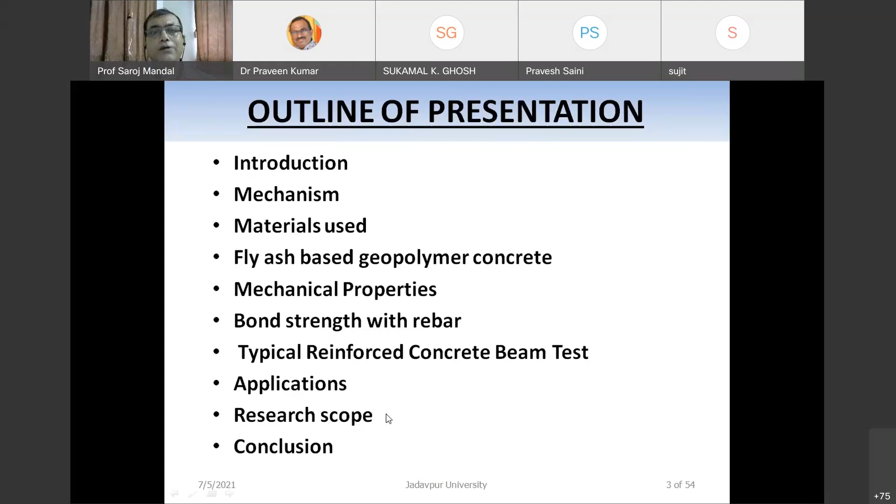So now I'm starting today's topic, geopolymer concrete. This is basically part of a project we have done in our university - strength and durability of fly ash-based geopolymer concrete, funded by the All India Council of Technical Education, New Delhi. The outline of the presentation is: introduction, mechanism of how geopolymer is developed, materials used to develop geopolymer concrete. I will specifically enter into fly ash-based geopolymer concrete, their mechanical properties, bond strength with rebar, and discuss some typical reinforced concrete beam applications of geopolymer. Then I will discuss the research scope, and finally conclusions.

Our concrete and cement industry faces so many challenges nowadays. These are basically the reduction of limestone, which is mainly used for production of cement. Production of 1 ton of cement produces about 0.9 ton of carbon dioxide, sometimes we are reducing it to 0.8. Cement industry is also a highly energy intensive industry. So we need some solutions to make our construction industry sustainable in a further direction.

So what are the solutions? The first solution, which we are already using in some cases, is blended cement. In our earlier days it was only OPC. Now we are using PPC, which is fly ash based, and PSC, which is blast furnace based, that is GGBFS, granulated blast furnace slag. So this is what is called a binary system.

So I have to use OPC partly replaced by fly ash or slag. The next development is the ternary system, where we use OPC, fly ash and blast furnace slag, which is termed a composite cement. All these are available in the market to reduce the use of limestone and reduce carbon dioxide generation.

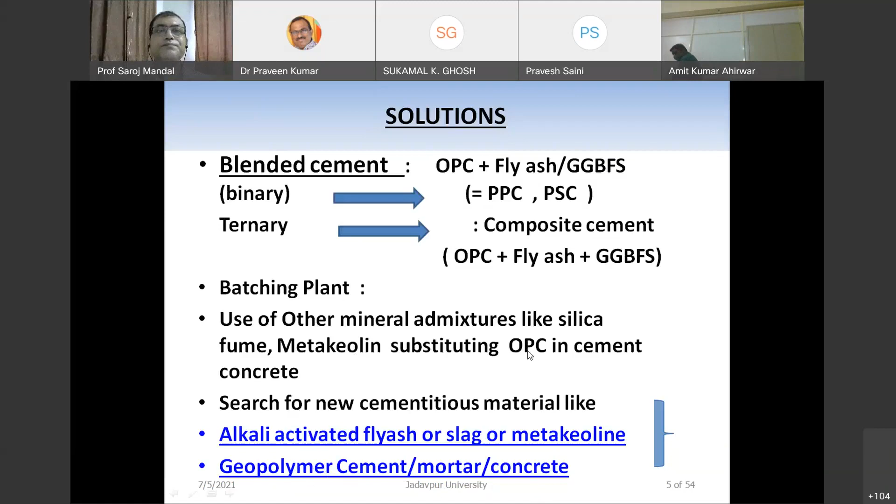Now what are the materials used for geopolymer paste, mortar or concrete? One of the main materials is the binding material. We have to use either fly ash as per IS 3812, or blast furnace slag as per IS 16714. These two are the most commonly used all over the world. We can also use other binding materials like rice husk ash, metakaolin, calcinated clay, reactive alumina, sugarcane bagasse ash, silica fume. This can be used one at a time or in combination of two or three.

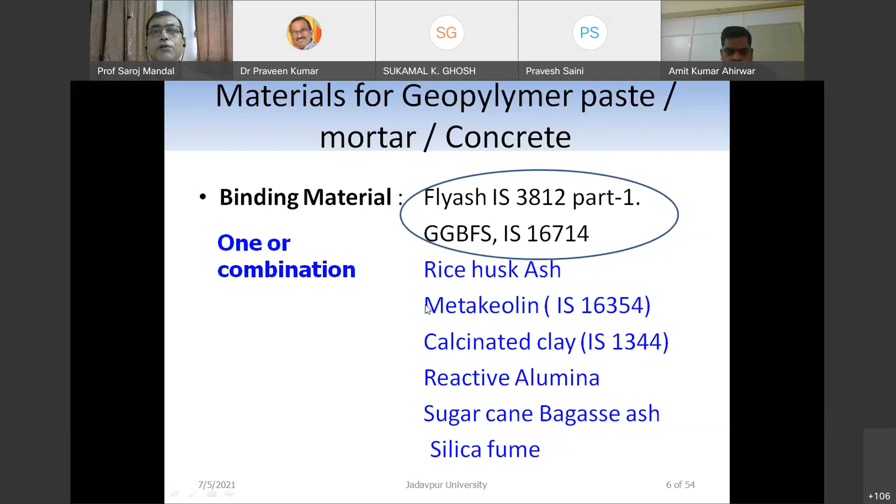Next, one of the important things we need is activator liquid. I will come later to how it is required. Now these activator liquids are basically sodium hydroxide and sodium silicate. This is one combination, and these two combinations we call the activator liquid. Similarly, we can use potassium hydroxide, potassium silicate. You can also use sodium carbonate, potassium carbonate.

Now, if we think of this pyramid, I think everybody knows about the Egyptian pyramid. It has been found that they used sodium carbonate for developing such huge structures. So these are basically called activator liquids. So I need these two as a combination, sodium hydroxide and sodium silicate.

Then comes, you can also use admixtures to improve workability. If we use mortar, naturally I have to add some fine aggregate like sand. If we want to develop concrete, we add coarse aggregate.

So it is basically a two component system, where cement and water is a cementitious system. Here, just like solid and fluid, not in terms of water - solid is like metakaolin, slag, fly ash, activated clay that I have already discussed. Out of these, slag and fly ash are mostly used. In case of fluid, we add NaOH, Na2SiO3, that is sodium silicate and sodium hydroxide. We can also add water and chemical admixtures. These we call in terms of a fluid.

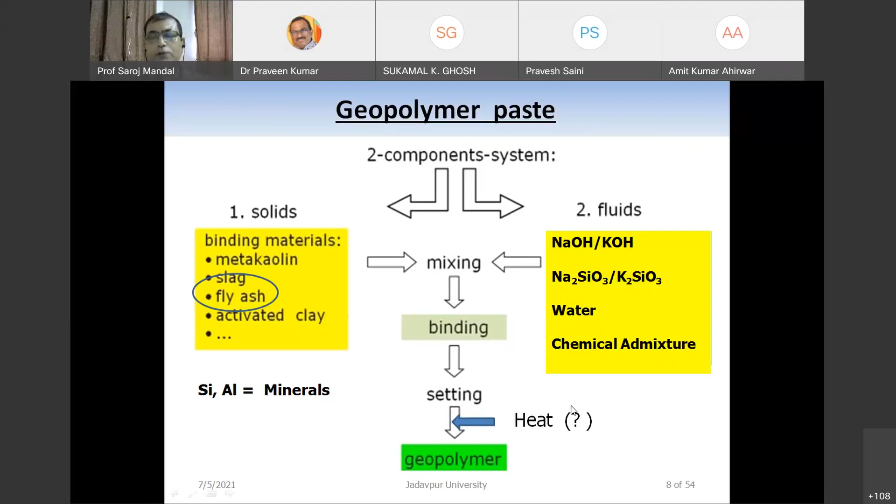Now, in case of Portland cement-based concrete, the development is OPC plus water. Then some hydration takes place, and we get a CSH gel, which is the most important binding material, plus we get calcium hydroxide, which is soluble in nature. Due to the presence of calcium hydroxide, the concrete or mortar becomes alkaline in nature. That is the basic OPC cement reaction.

Now if we term it as PPC, let us say OPC plus fly ash. Fly ash has some amount of reactive silica, and when we add water, the first stage is due to hydration, the PPC, which contains OPC plus fly ash, the OPC reacts with water to form CSH gel plus calcium hydroxide. That is step 1, what is called the hydration reaction.

Now, in the second stage, this calcium hydroxide reacts with the reactive silica. Why is it called reactive silica? Because this silica reacts with alkali, and these reactions we normally call pozzolanic reactions. It again forms a CSH gel. This is the step 2 reaction, which is why it's called the pozzolanic reaction. The first one is called hydration, and the second one is called pozzolanic reaction.

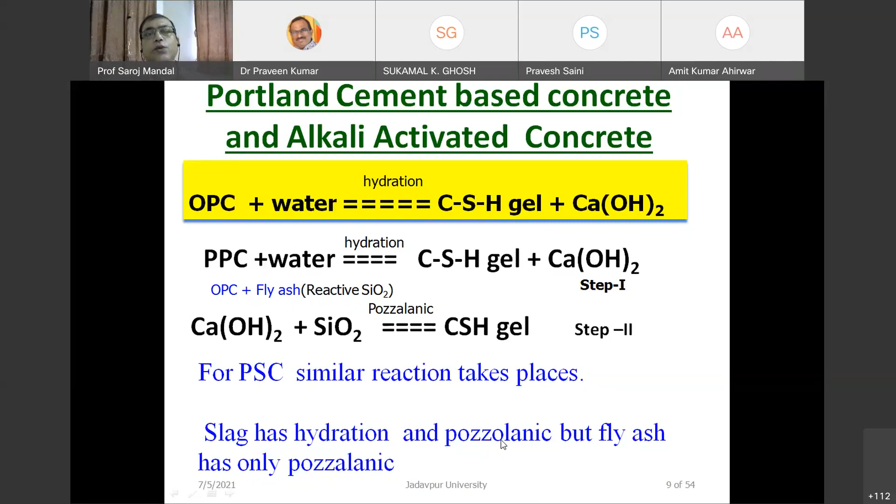Is this clear? Now if we come to alkali-activated concrete or geopolymer concrete, both are the same. Sometimes it's called alkali activated - why? The basic idea is very simple. If we add fly ash or slag with an activator, the activator liquid contains, as I've already told you, sodium hydroxide, sodium silicate and water.

This sodium hydroxide is similar to the calcium hydroxide already used in pozzolanic reactions. It reacts with fly ash and slag, which contain silica and alumina, and due to this, polymerization reactions take place in the presence of heat. I must say here, heat must be given, otherwise these reactions take a long time. Then we get an aluminum silicate chain plus water. This aluminum silicate chain is basically an inorganic polymer binder which binds the aggregates - fine aggregate in case of mortar, and coarse and fine aggregate in case of concrete.

So the basic idea is we are using activation of alkali here. Alkali is used here, not in the form of alkali generated in cement production, but separate alkali is added - sodium hydroxide as an alkali - which reacts with fly ash to form polymerization reactions, and due to this, in the presence of heat, some water is also developed. The most important part is that we add some water in the initial stage and we get some water after the reactions also.

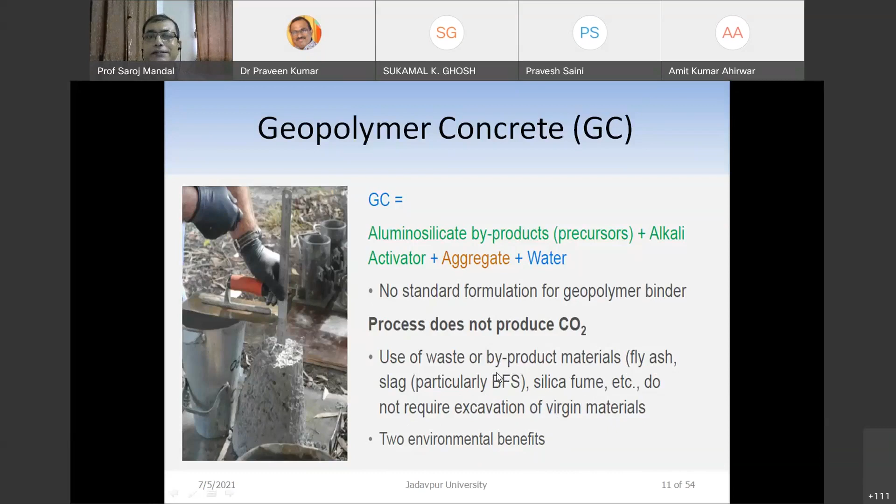The only requirement is heat, and for that heat we have to give some amount of carbon dioxide. There's also use of waste or byproduct materials - mainly fly ash, slag, silica fume, etc. - and it does not require any excavation of virgin material. So we are getting here two environmental benefits in geopolymer concrete.

I have already discussed it. Now I am coming to your specific area, that is discussions. I am limiting to your alkali activated fly ash concrete.

So here the binding materials, I am using fly ash. Alkali activator, I am using sodium silicate and sodium hydroxide. Fine aggregate, coarse aggregate, extra water or admixtures you can use.

I have already told you about the heat needed for the polymerization process, and there is a lot of scope for research to reduce this heat generation or to apply heating for this polymerization process.

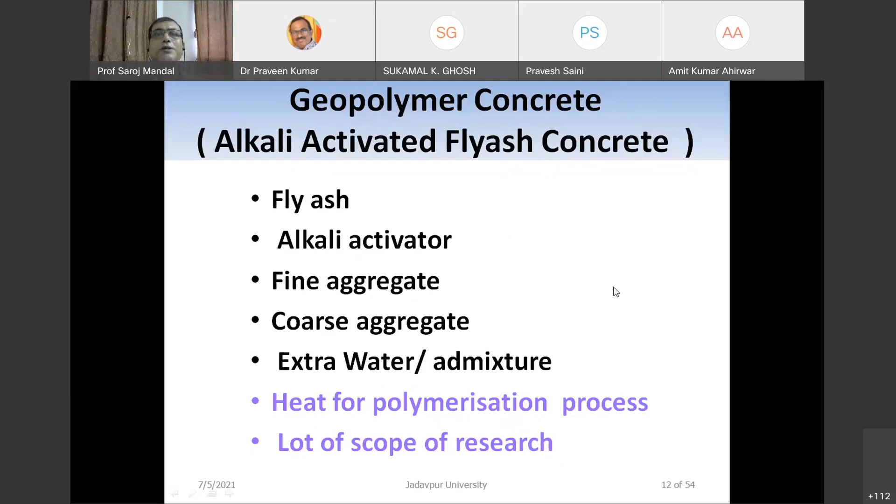Now, what are the benefits of using alkali activated fly ash concrete? I have already discussed the use of substantial amounts of byproduct material such as low calcium fly ash. So I am consuming this waste.

So I am using less energy, needing less than 100 degrees C for the polymerization process compared to 1000 degrees C needed for cement production. Although heat is required in these cases, it is not more than 100 degrees C, whereas in cement production, about 1000 degree temperature is needed. So naturally, you can see what benefit you are getting here.

I will show you later that the economic benefit is approximately 31%, and further benefits can be added. I will discuss this later.

Now some applications of geopolymer concrete, as I have already told you, heat is required, so it is very difficult to apply geopolymer concrete directly for normal constructions. So one advantage of using geopolymer concrete is in the precast industry, where you can cure or activate it by heat in a factory system.

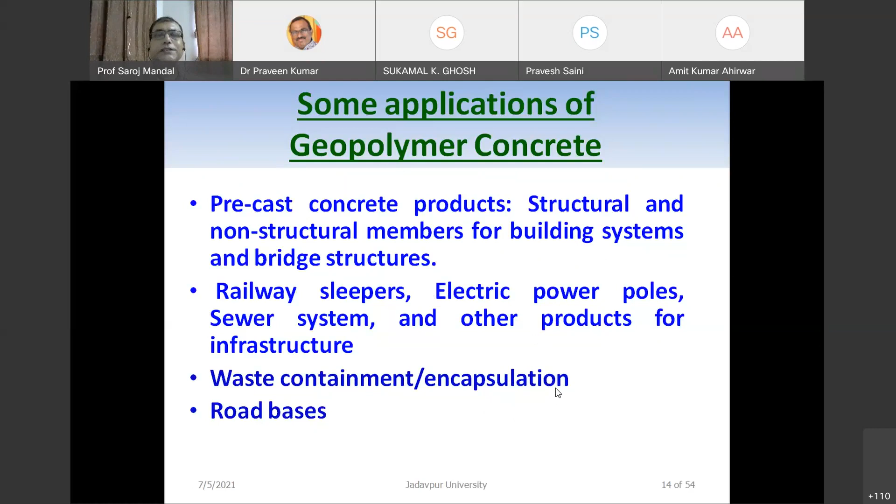So precast concrete products, which may be structural or non-structural members for building systems or bridge structures, railway sleepers, electric power poles, sewage systems, and other infrastructure products. Waste containment structures, encapsulations, road bases - these are where you can use geopolymer concrete.

Now, if we come to the literature review, some important parameters which influence geopolymer binding: one is the chemical composition and mineralogy of the binding material. This is also called your precursor - precursor meaning just the initial stage of your geopolymer.

So there is a lot of scope. There are so many materials available - fly ash, slag, and other materials you can add and mix. So there is a lot of scope here.

Next is the amount and form, which may be solid or liquid, and type of alkali activator - normally NaOH, KOH, sodium silicate or potassium silicate - with optimum Na and aluminum ratio being around 1 to 1.5. These are the factors: you have to keep the sodium and aluminum ratio at 1 to 1.5 to get good geopolymer concrete. The silicon and aluminum ratio of the binding material should be optimum at 2.5 to 4.

And the amount of available calcium source such as Portland cement, blast furnace slag, and lime. I have already told you that I am using sodium hydroxide for activation. I can also get calcium hydroxide directly from cement, or from slag, for the initial reactions.

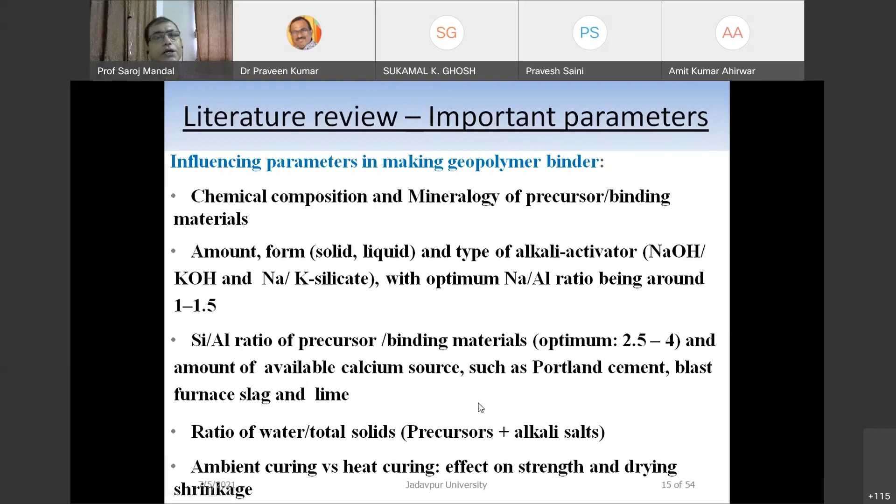Next comes the ratio of water to total solid - total solid meaning your alkali salt and the precursors, that is your binding material. Then comes ambient curing and heat curing, as I have already told you - heat activation or ambient activation - and their effect on strength and drying shrinkage. These are very important topics you can get from the literature reviews.

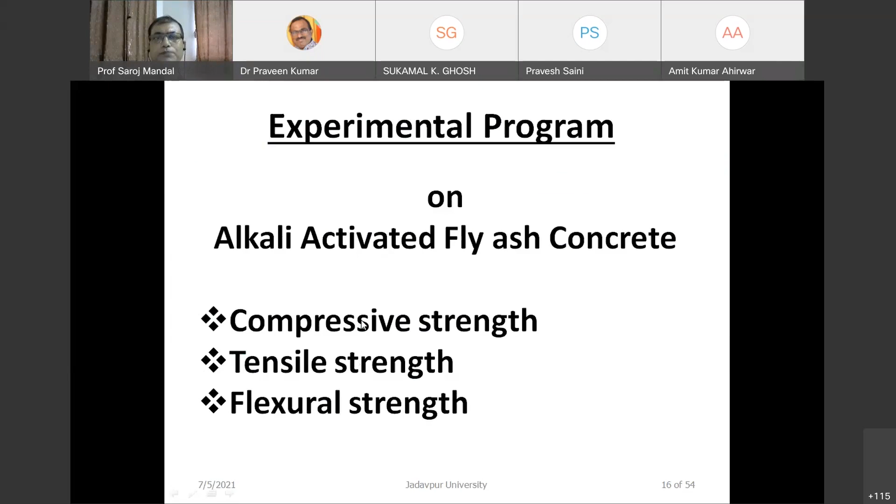So now let us come to alkali activated fly ash concrete. First we are restricted to compressive strength, tensile strength and flexural strength.

If we come to the fly ash, the source of these materials is low calcium class F, as per American ASTM, American Society for Testing and Materials. Class F means it has no binding material itself. There is another type called class C, which has its own binding capacity, but for class F, there is no binding capacity itself.

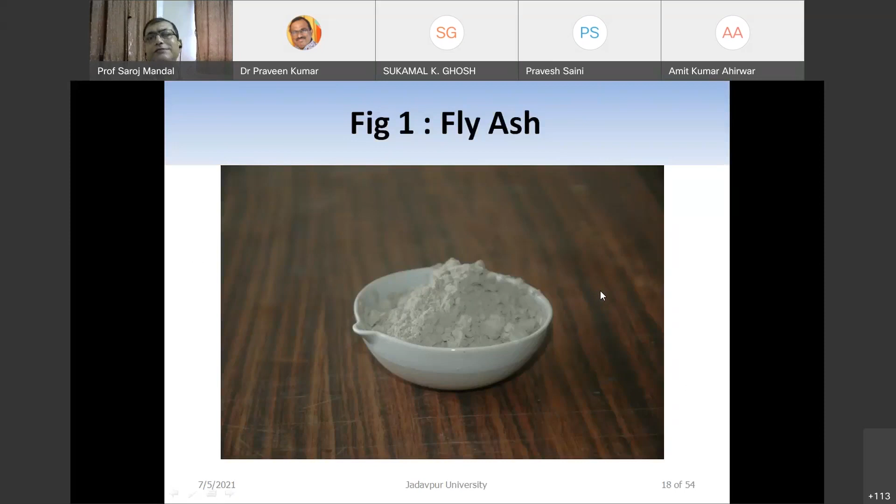And this is collected from the NTPC Farakka plant. These fly ash are basically a very fine material - this is what is called fly ash. It is very fine and white in color. Silica content, if you see, is about 64.97.

This is very much important, and alumina content is 26.64. These are two important parameters that are required. Another important part is loss of ignition, that is 1.03. If it is very high, it creates some problems in your workability.

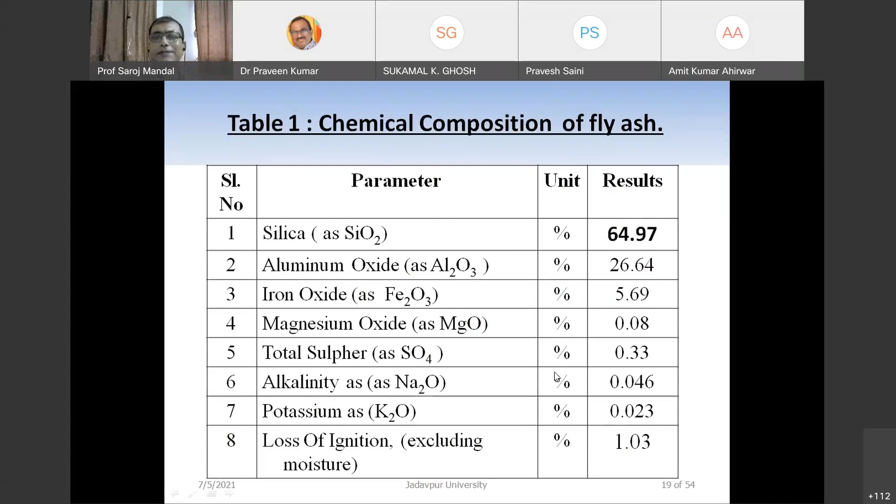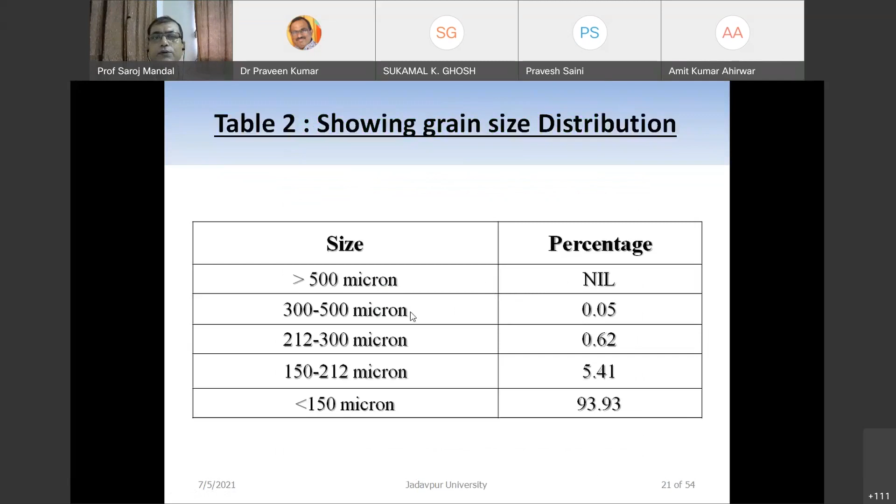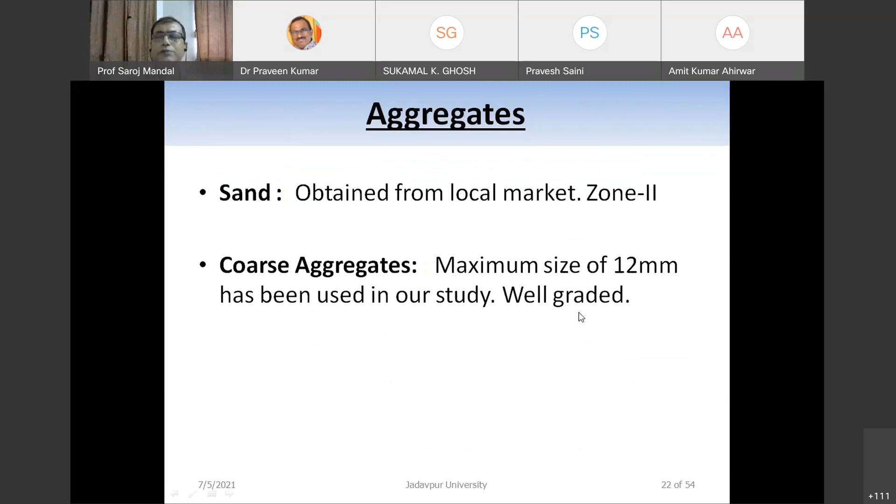Then we are using the sand obtained from local market, which is zone 2 sand, and coarse aggregate. Maximum size we are using is 12 mm. This is well graded, and you can also use 16 mm if you look at, but throughout our study we have used 12 mm. Now, just I am showing this aggregate and fly ash.

Now, the activator compound, sometimes we call activator liquid, is sodium hydroxide, that is NaOH. We are using here commercial grade, which is easily available. Why commercial grade? Just to get your idea about what is available, and the cost, to reduce the cost also. So commercial grade is available in pellet form, about 5 mm diameter, and purity is 99%. That's why it is called commercial grade. It is solid in nature, and it is hygroscopic - if we keep it in open, it takes the moisture and becomes melt.

Now, sodium silicate, which is in liquid form, we also use commercial grade. As it is a liquid, it is very much important what is the solid content present. We have checked, it is 45% solid, and the remaining 55% is water. This water is just added - it does not take part in any reactions. I've already told you it is added only to improve your workability. So this is what is called your commercial grade sodium hydroxide and sodium silicate solution.

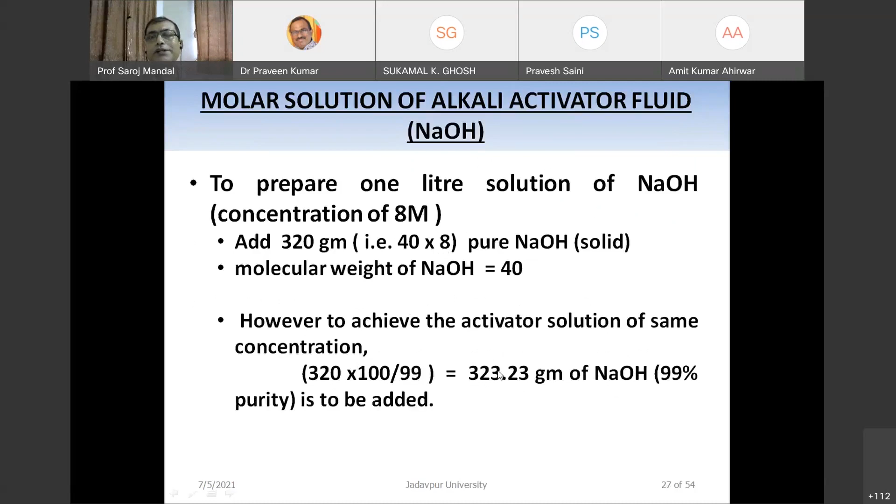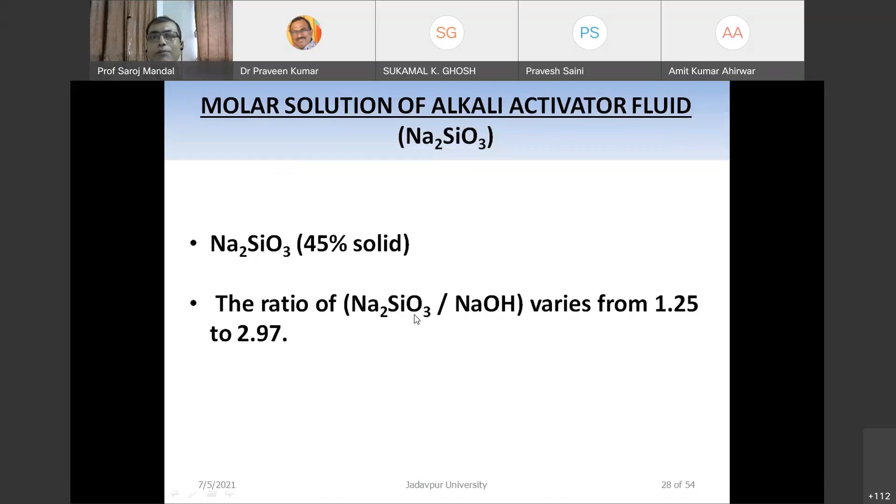So sodium silicate, I have already told you is 45% solid, and in my case I have varied the solid content - that is the ratio of sodium silicate and NaOH varies from 1.25 to 2.97. I will show you later. That is basically the amount of these two varies by weight.

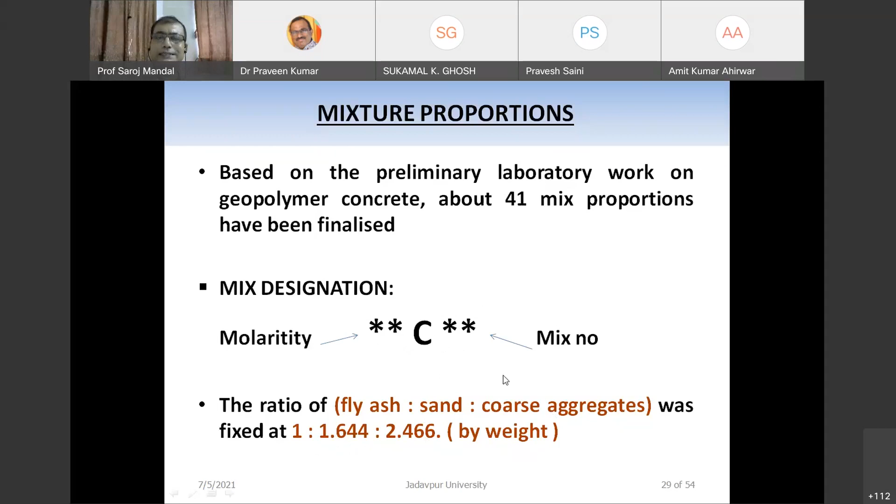Now, based on some preliminary laboratory works, we have about 41 mixes, and we have designated the mix like this. On the left hand side we put molarity, and the right one is the mix number. Suppose we say 8C2, that means mix number is 2, and 8 is your 8 molar mix. The ratio of fly ash, sand and coarse aggregate was fixed for all the 41 mixes at 1:1.644:2.466. This has been done after so many trials.

Now, I have checked the concentration. I am starting from 8, 10, to 12, up to 20 molar.

So what will be the effect if we add more quantity of NaOH, that is, if we add more alkali? Everything else remains same. Fluid to fly ash ratio - fluid means water, that is, we are putting some extra water in the sodium silicate solution. Total water we call the fluid. So this fluid to fly ash ratio is from 0.35 to 0.58.

That is, if we add more water, what will happen? Water to fly ash ratio - water means this extra water added - varies from 0.207 to 0.4. And water to geopolymer solid - geopolymer solid means fly ash is a solid, NaOH is a solid, and the solid present in sodium silicate we call a solid - so water to geopolymer solid ratio varies from 0.181 to 0.338.

So all the mixes I am just showing later.

Next, I have already told you that curing is an important part. So I particularly do not use this curing term. I always try to use activation, because curing is basically used in your normal concrete. I call it better to prefer activation, although in most of the literature you get this term curing also.

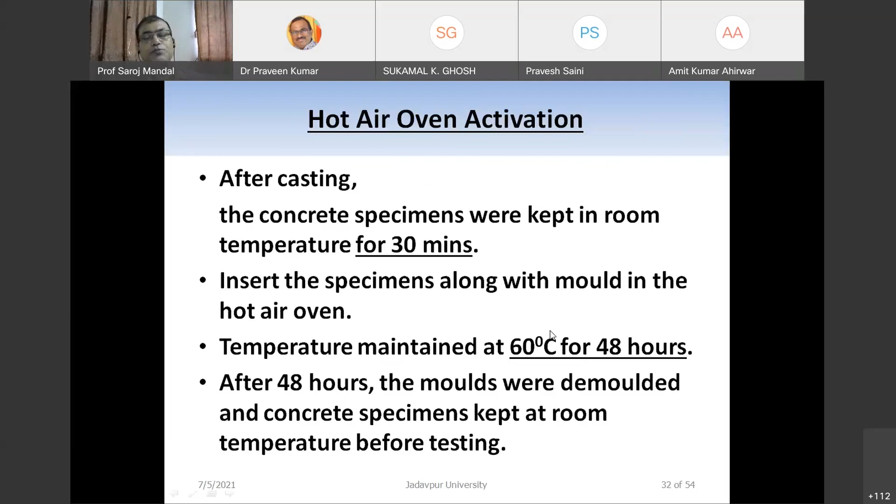Now, when we talk about the rest period - so as it is 48 hours, that means your total system, in case of a precast system, will be blocked for 48 hours, that is 2 days. So if we can reduce it to 1 day, that is 24 hours, you can reuse your system, that is, at least I can reuse my molds, right?

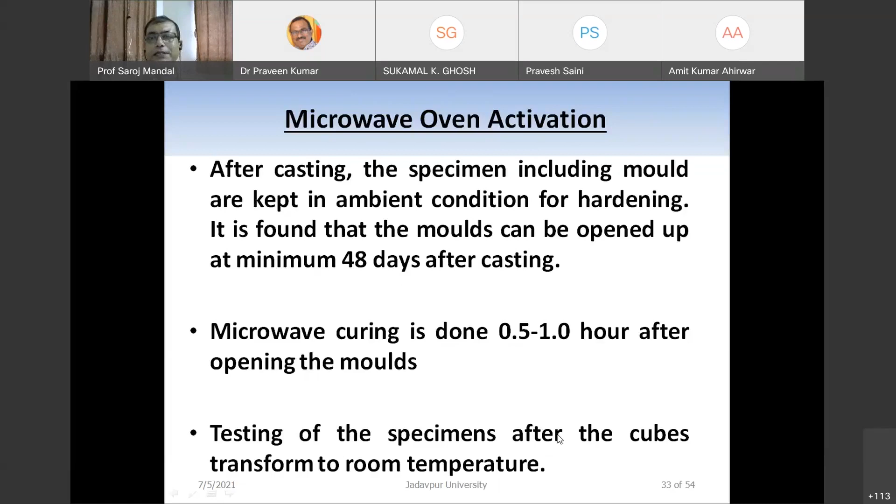So I'm coming later now - microwave activation. After casting, specimens including the molds are kept in ambient condition for hardening, and it is found that molds can be opened after a minimum of 48 hours after casting. After 48 hours you can remove the mold, get the sample, and the sample is then cured in a microwave for 0.5 to 1 hour after opening the mold, and testing of the specimen is done after the cubes return to room temperature.

Now, all are 8 molar up to 18, right? Here you can see 1 hour - this is the rest period of 1 hour.

After 24 hours, the molds are opened and the specimen is kept inside again. So the rest period is similar to the hot air oven. After casting is over, we wait for 30 minutes, then insert the mold and concrete into the oven. After 24 hours, remove it and remove the mold, so I can use the same mold for other samples after 1 day. That is what is called the 1 hour rest period.

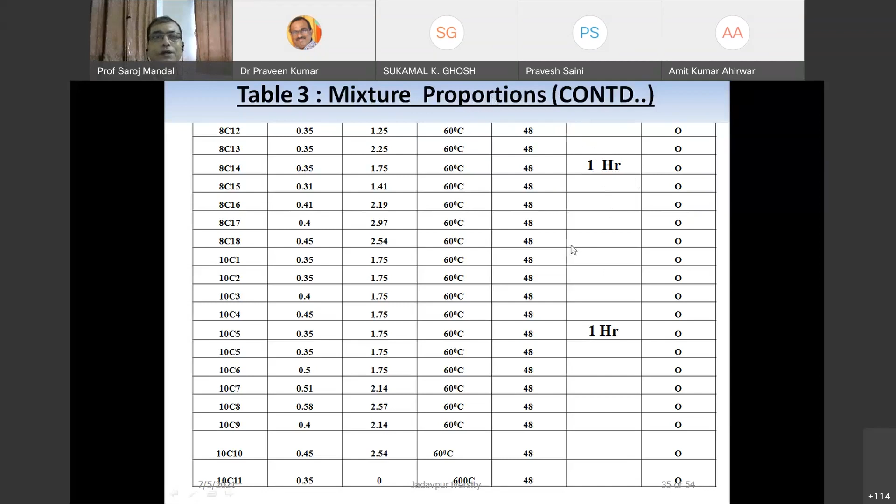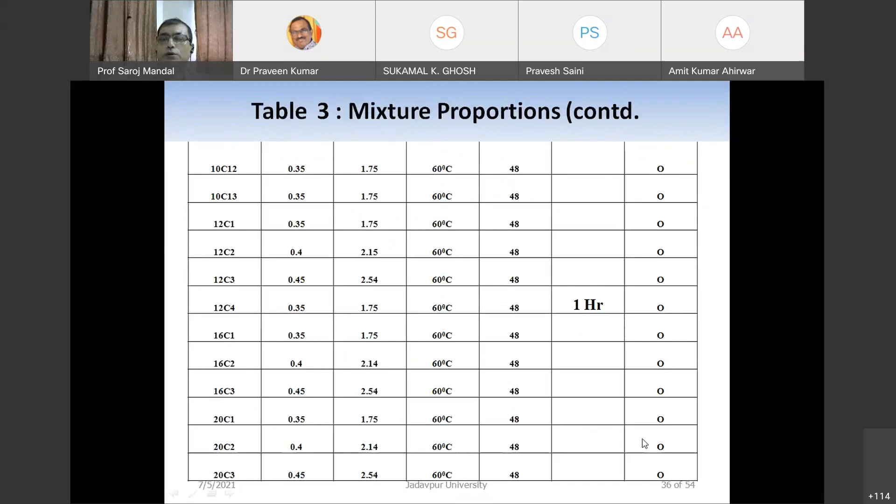After that, only the samples are cured. So then I am using 10 molar, 12 molar, 16 molar, up to 20 molar. I'm not going into detail of this. Basically, in most cases we are putting them in the hot air oven, O means oven. Now come to the mixing and casting procedures.

This is the normal casting procedure. Mix the aggregates, fine and coarse, in dry condition, then wet in a tilting mixer for 2 minutes. Then we add fly ash for dry mixing again for 3 to 5 minutes. Now we add activator solution, which is prepared at least 1 day prior to its use. The alkaline activator fluid was then added and mixed for 3 to 5 minutes till a homogeneous mix was obtained. So this is the solution, you have to add it like this. This is the normal procedure, similar to normal concrete also.

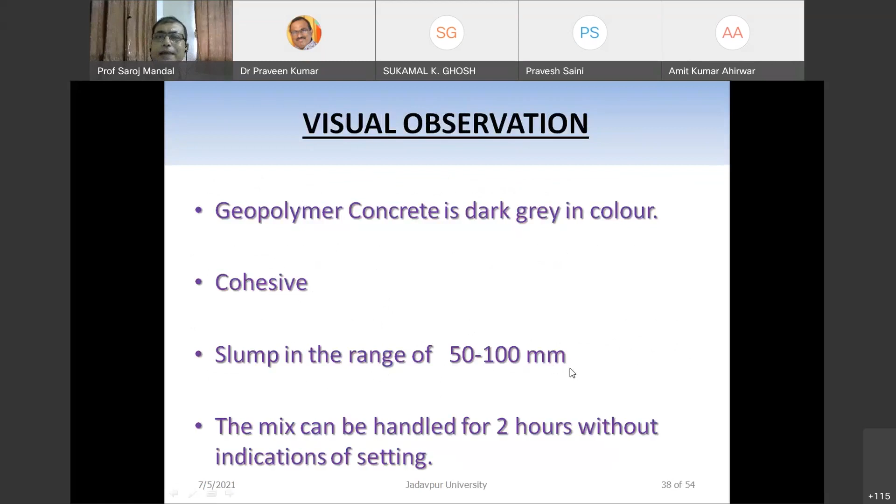Now visually, geopolymer concrete is dark gray in color. It is much more cohesive compared to normal concrete. The slump range we have assumed is 50 to 100 mm. The mix can be handled for 2 hours without any indication of setting. These are the visual observations.

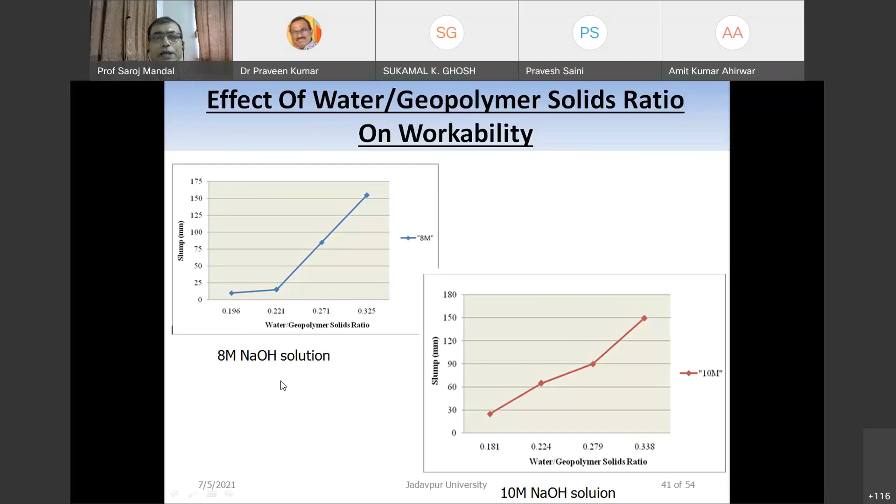Now I am coming to the test results one by one. If we add more water, keeping everything else the same, say for 8 molar NaOH solution, adding more extra water increases the water to geopolymer solids ratio, so naturally the slump increases. This is for 8 molar NaOH. It is also quite natural for 10 molar, as we are adding more water.

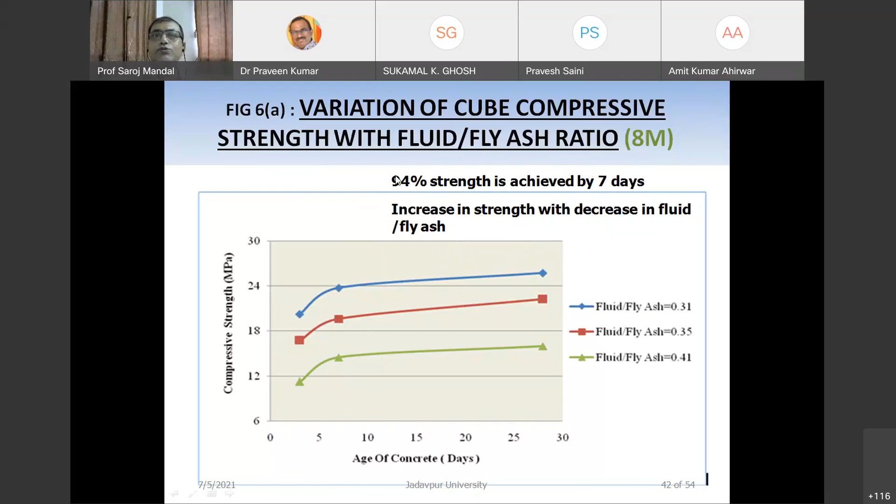But after 16 molar, there is a decrease in strength. Why does strength decrease? That is also a question, right? Now, what we think is that at 16 molarity we get an optimum value. Now why are we getting an optimum value? I have already told you that in a particular mix, we have a certain amount of fly ash, and to activate the fly ash, we need a certain amount of alkali.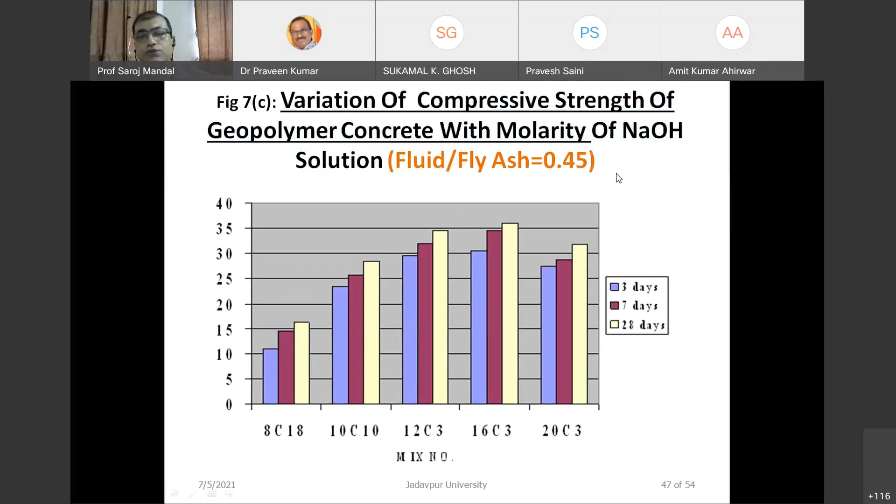This is also applicable to other fluid to fly ash ratios. If I change the fluid to fly ash ratio, similarly for other ratios we also get these same kinds of values.

Now for 8 molar, if we change the sodium silicate to sodium hydroxide ratio, checking at 3, 7 and 28 days: here sodium silicate to sodium hydroxide, in the first line that is 8C10, I put it as 0. Then it is 2.079 and 2.76. So you see that if we increase the amount of sodium silicate, keeping sodium hydroxide the same, from 0 to other values, at all ages your strength increases.

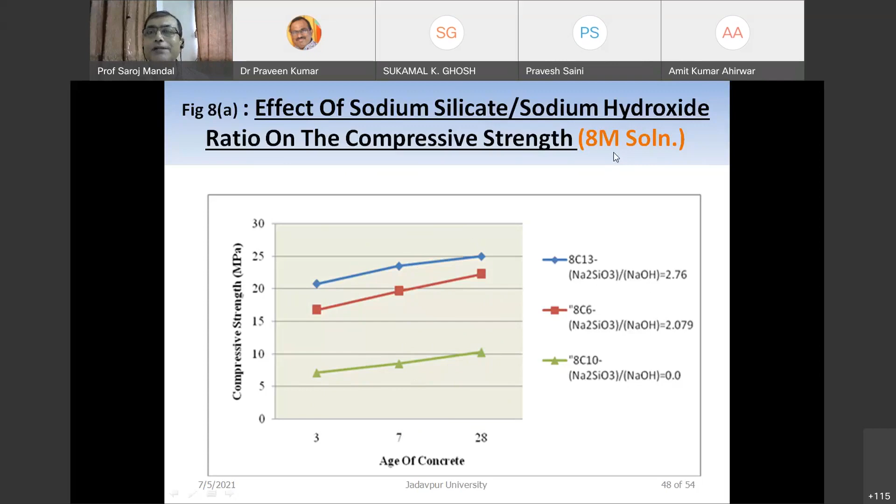This is shown here for 8 molar at all ages, and I have also done it for 10 molar solutions - it increases in both cases.

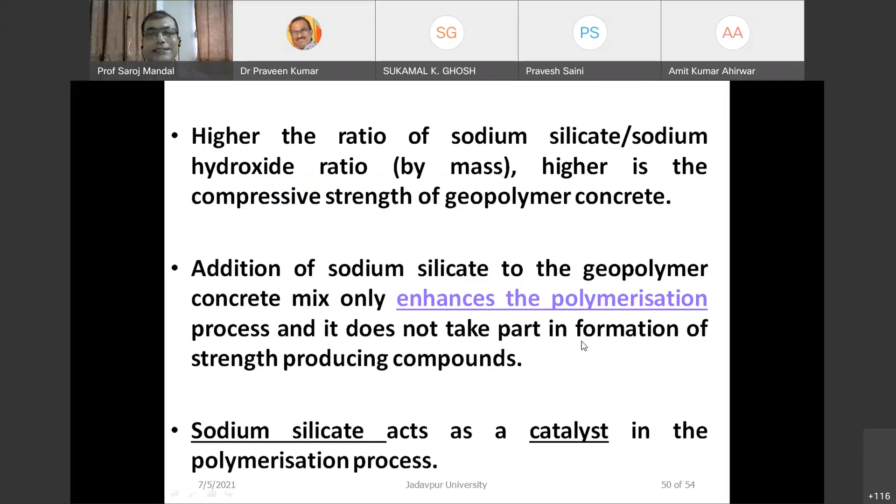So what we can see is that sodium silicate has a role, but it is not expressed directly in the reaction. What is estimated is that it basically acts as a catalyst. So a higher ratio of sodium silicate to sodium hydroxide gives higher compressive strength of geopolymer concrete. Addition of sodium silicate to the geopolymer concrete mix only enhances the polymerization process and does not take part in formation of strength producing compounds. So sodium silicate acts as a catalyst in the polymerization process.

Now come to duration and temperature in the case of hot air oven curing. This is the mix - you see all mixes are cured for 48 hours duration of activation, tested at room temperature, 60 degrees C hot curing, 75 degrees C, and 90 degrees C.

If you increase the temperature of curing, keeping duration at 48 hours, strength increases from 3.5 to 16.75 to 19.87 to 20.5 across 3 days, 7 days and 28 days. At 28 days, it increases from 22 to 25.5.

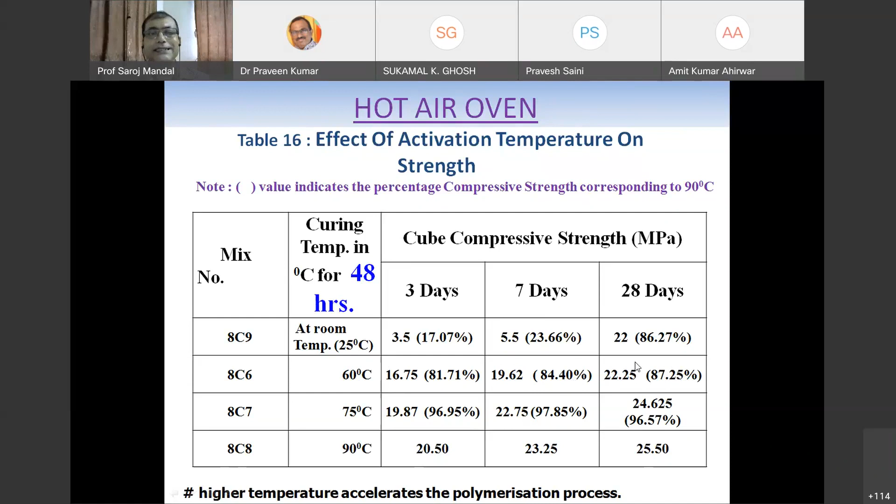Now come to the microwave oven - I have already told you what that microwave oven is. These are the mixes, and this is the wattage and the durations used.

If we calculate the watt-hour, that is the amount of energy used, this is only to check what is the heat energy given in terms of watt-hour. It is shown here for 3 days, 7 days and 28 days cube compressive strength, and it shows that if we increase the energy, the strength has increased.

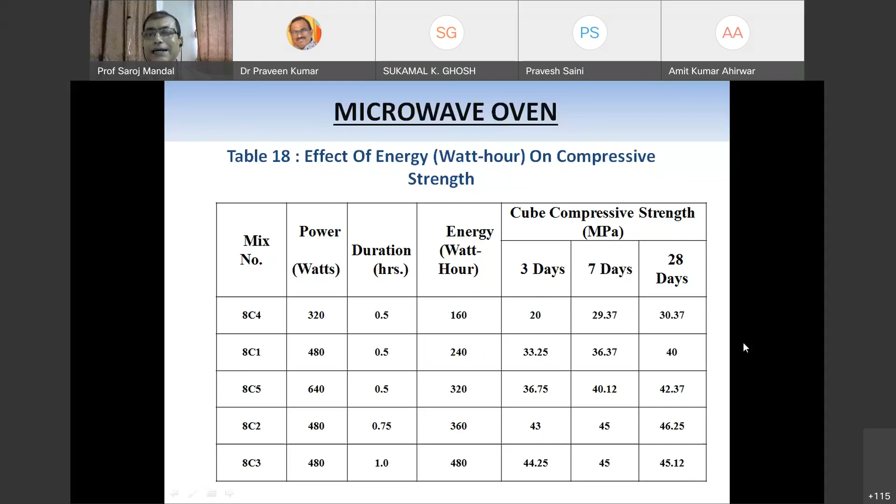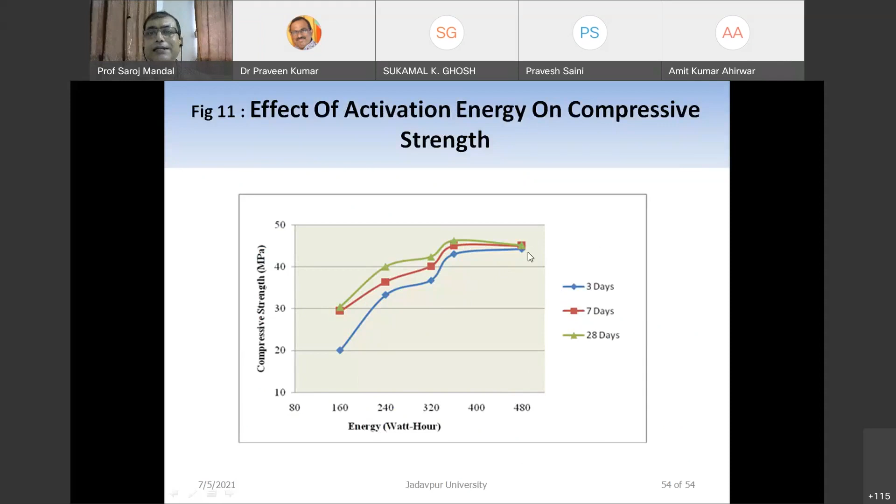So if we put in your graphical forms, some of the data are not regular. If we increase the energy, in watt hour, the strength normally increases, but ultimately it gives almost the same value. So with the increase in electrical energy, the compressive strength of geopolymer concrete increases.

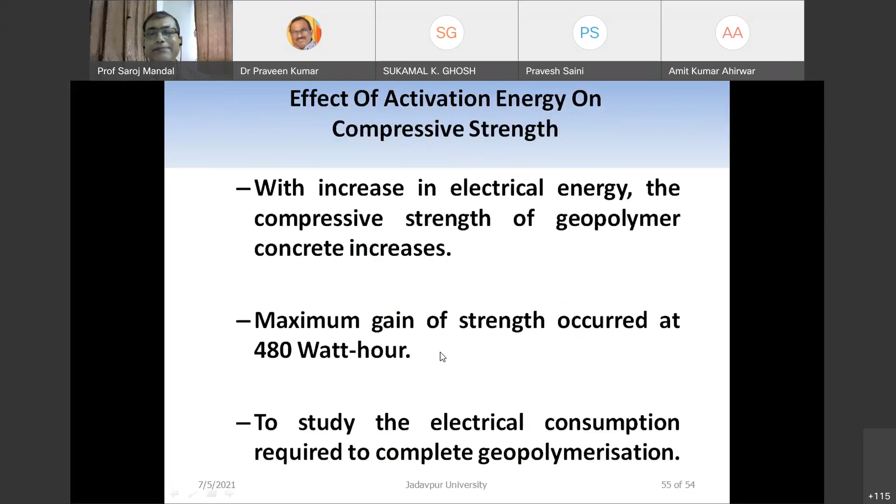Maximum gain of strength occurs at 480 watt hour. We study the electrical consumption required to complete the basic aim, which is the energy required to complete the geopolymerization. Next comes the 1 hour intermediate rest period.

This has some advantages. I have already told you that we can reuse our mold in that case. This is the time period during which geopolymer concrete specimens are kept at room temperature after initial curing of 24 hours. Total curing time is 48 hours. So after 24 hours, I remove it and we wait for 1 hour, then after removing the mold, we again put the sample inside the hot air oven for the next 23 hours to make it a total of 48 hours.

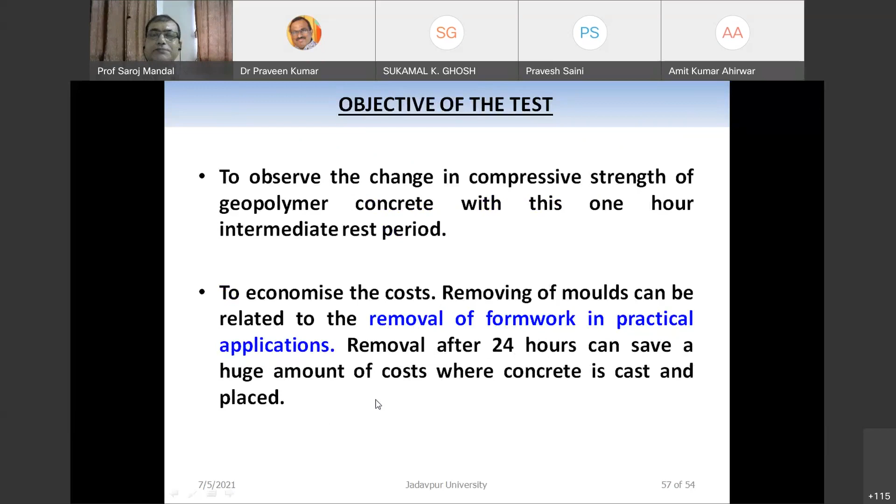So our objective of this test is to observe the change in compressive strength with this 1 hour intermediate rest period, and to economize the cost. How can we economize? By removing the molds related to the removal of formwork in practical applications. Removal after 24 hours can save a huge amount of cost where concrete is cast and placed, so we can reuse the mold in that case.

Now you see we have put this as the mixes. This is 1 hour rest period and there is no rest period - total continuous 48 hours versus 48 hours with a 1 hour rest period. So if we put a 1 hour rest period, the strength is almost the same, for the 8 molar, 10 molar and 12 molar. So we can say that if we make this rest period of 1 hour for removal of the mold, we get some advantages, with no changes or reduction in strength.

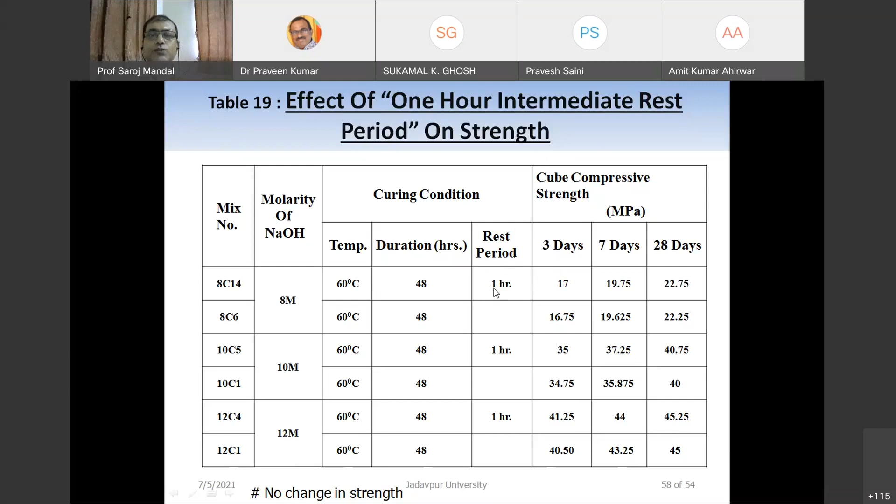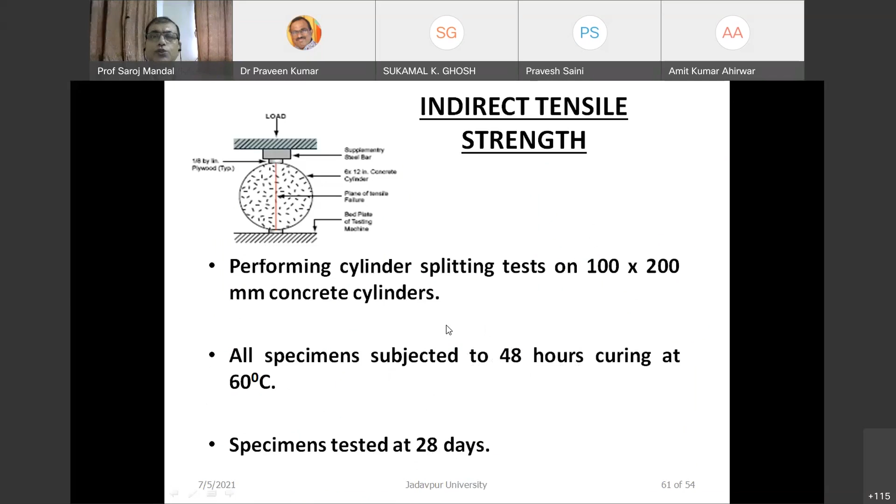Now I am coming to the tensile strength instead of the compressive strength. We have already done the strength test in 28 days, and all the specimens are at 60 degrees C and 48 hours. Why? Because we have already tested that this becomes the most appropriate, or you can say the most optimum duration and temperature to get a good geopolymer concrete for heat activation systems.

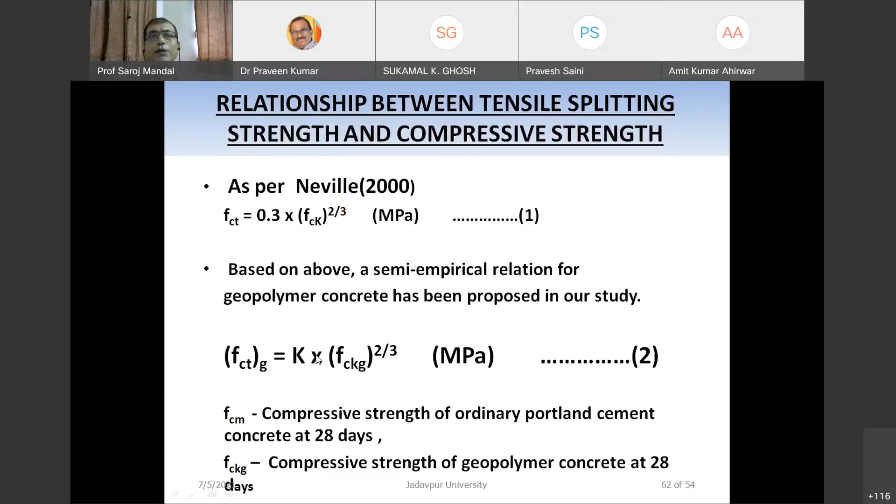Now we have tried to develop some relationships with the compressive strength. This is as per Neville. We have used FCT, that is the tensile strength is 0.3 times FCK. We also tried to calculate the same in terms of geopolymer - so geopolymer compressive strength, what will be the geopolymer tensile strength, and what will be the value of K? K for normal concrete normally becomes 0.3.

Now we have tried with all 3 different molar solutions, that is 3 different strength grades. This is basically the FCK strength of geopolymer concrete - 22.25, 40 and 45. Now this is the indirect tensile strength by equations - meaning if we use OPC, considering the equivalent FCK in terms of normal concrete, what should be the equivalent tensile strength in concrete? So the indirect tensile strength experimentally is comfortably higher in terms of geopolymer, and the average factor comes to 0.34, which is higher than 0.3.

Comparison of indirect tensile strength. Hello, any problem? Any problem? Hello. I have muted all and will unmute you, sir. I think you are muted, so you may carry on, sir.

Okay, comparison of indirect tensile strength of geopolymer and ordinary cement concrete. If you see the reactions - that is your experimental geopolymer concrete and the equivalent normal concrete - you get these curves like this.

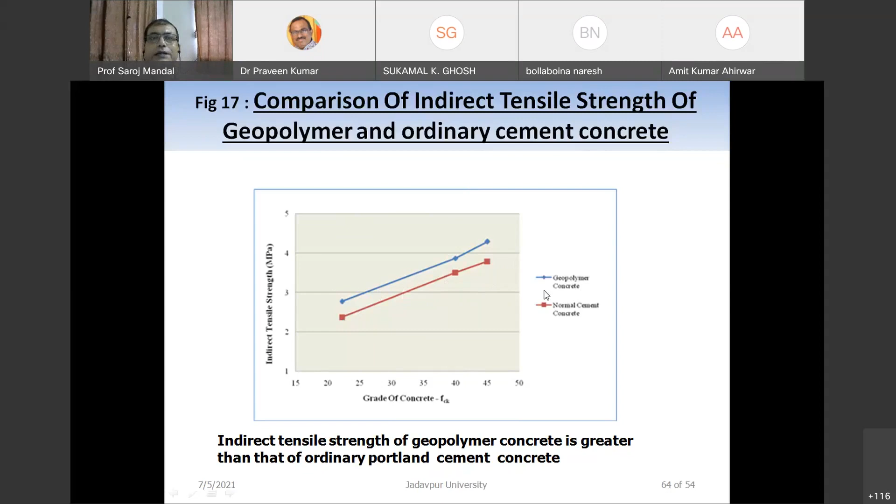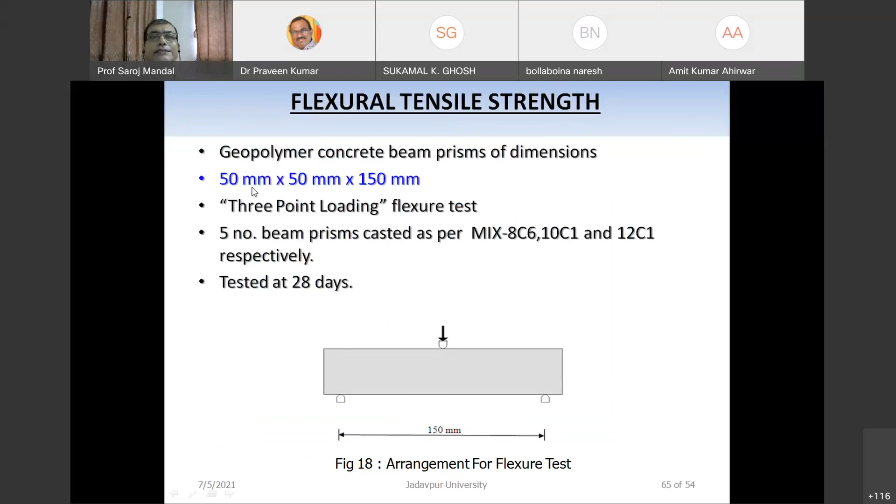So next we are covering the flexural tensile strength, which is beyond the indirect tensile strength, that is the prism test. Now we're coming to the prism test, that is the 3-point test. We are taking the sample as 50 by 150 with a 3-point loading. If you see here, the failure load is like this, so this is already known as FCK values, and we got the geopolymer testing values. If we normally take OPC as 0.7 root over FCK, the values are like this. So we are getting, in the case of geopolymer, comparatively higher values of flexural strength compared to normal OPC.

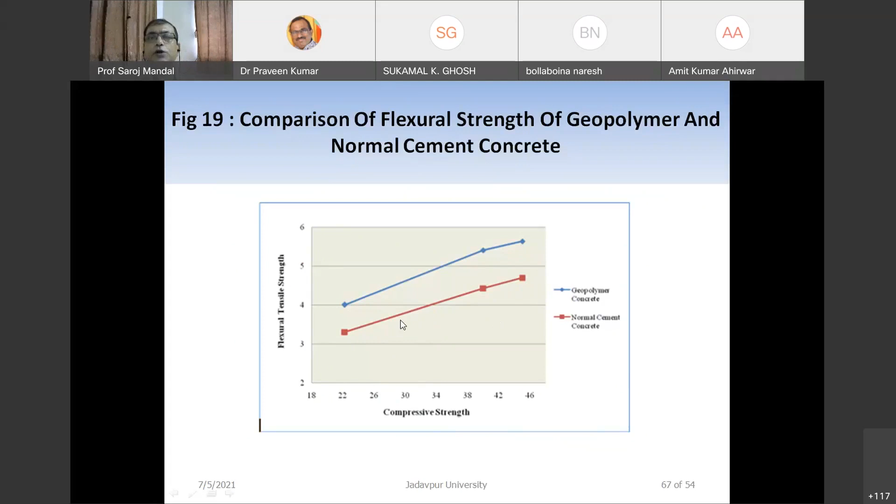So this is the same comparison, this is your geopolymer concrete. That is the compressive strength versus flexural strength graph, and this is for your available 0.7 root over FCK. If we calculate this, we can get this value.

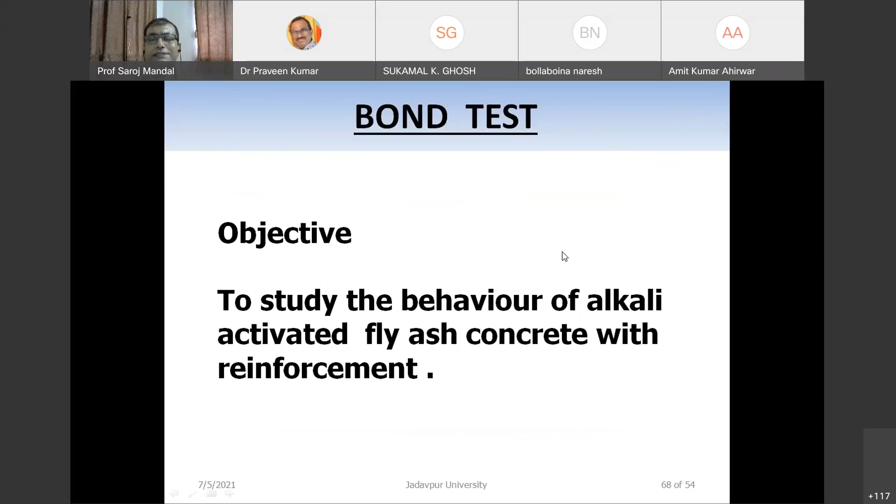Now next we have studied the bond behavior, that is how geopolymer concrete behaves with bond with reinforced concrete. Our objective in this case is to study the behavior of alkali activated fly ash concrete with reinforcements.

Here we have tried only 12 and 10 molar solutions. Grade used is almost near M20 to M30. Thermal activation is 60 degrees for 48 hours. We are using conventional concrete for comparison, that is water cured, and we are using steel bars of grade Fe415, which was available at that time. Diameter used is 20mm and 16mm.

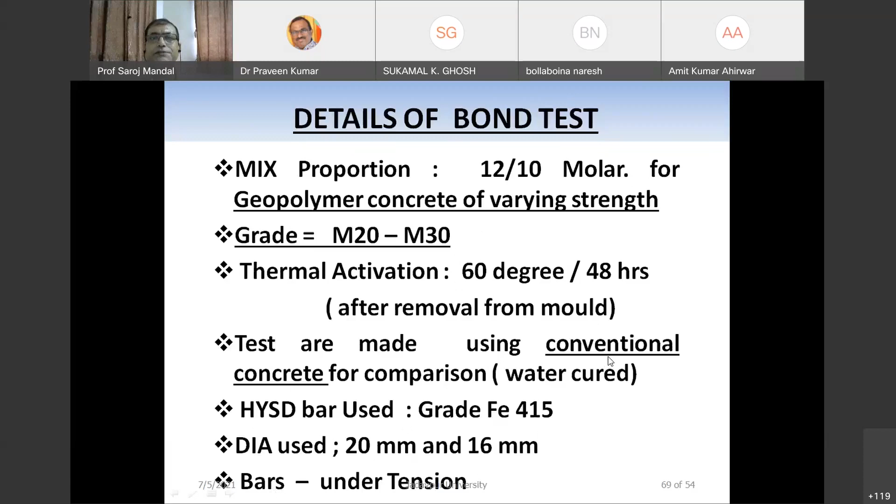Bars were under tension. Now how has the test been done? Basically these are normal cubes, and the bars have been put inside by some arrangement. The bars are cast in, and this sample is then put in another testing arrangement where there is a bottom plate, and this plate is held in your normal compression universal testing machine, and the bar is also held in the universal testing machine. So this is the plate and this is the plate, and inside this the specimen has been kept, connected with 4 bolts of 20mm diameter.

There is a gap between this top plate and this bolt and the bar. So naturally, when this bar is under tension, the load is transferred from this element to this plate.

So if you see this bond test example, this is the bar which is inside the concrete. How it is tested: the bottom plate is held in a universal testing machine, and the top bar is also held in the universal testing machine. Now it is put under tension, so the load is transferred like this, ultimately coming to the lower plate. So this concrete will be basically supported at the top plate.

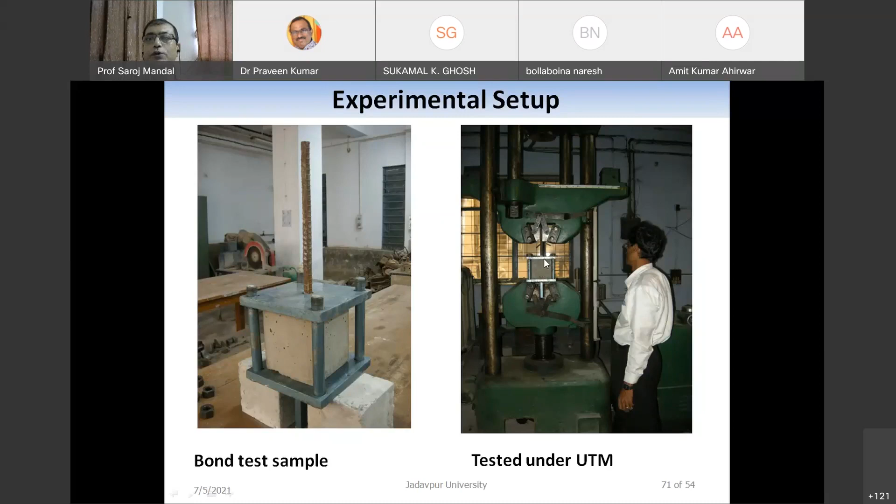So if you see these results of this bond test, that is your FCK and FT bond values, this red color is the experimental values of bond strength for normal concrete, using the same grade of concrete.

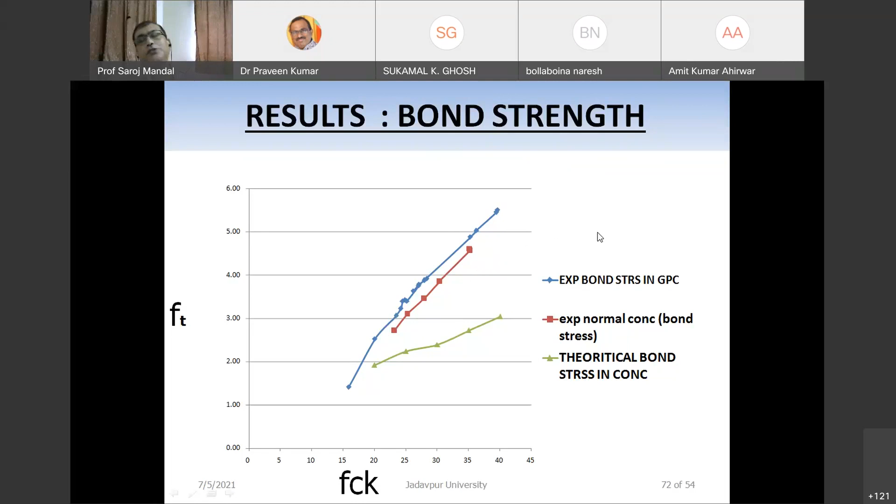Next, we have tested some reinforced concrete beams also to study the load deflection behavior in flexure, and the effect of increasing the percentage of reinforcements. We add some percentage of compression reinforcement also. Beam size is 100mm by 150mm deep, and the span is 1 meter. Grade of concrete used is normally M35 grade of geopolymer concrete. Activation is 60 degrees for 48 hours after removal from the wooden mold.

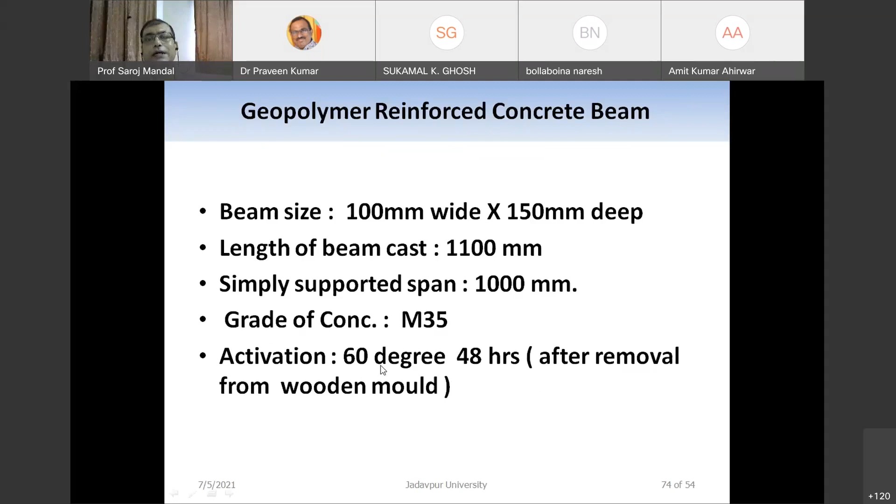So in this case, as it is cast in a wooden mold, after 1 day we remove the mold, and then the whole specimen is heat activated for 48 hours at 60 degrees C. We are using 5 beams. In tension zone, we use 2 numbers of 5mm tor bars, 3 numbers of 5mm, and 2 numbers of 8mm bars. This is used to make the section under-reinforced. These are 2 sections, one is under-reinforced and the other becomes over-reinforced.

Similarly, for the 3-5 tor bars, we use compression reinforcement, but in this case we don't put any compression reinforcement, just some wire. In this case we use 2 numbers of 5mm and 3 numbers of 5mm bars, both of which are under-reinforced.

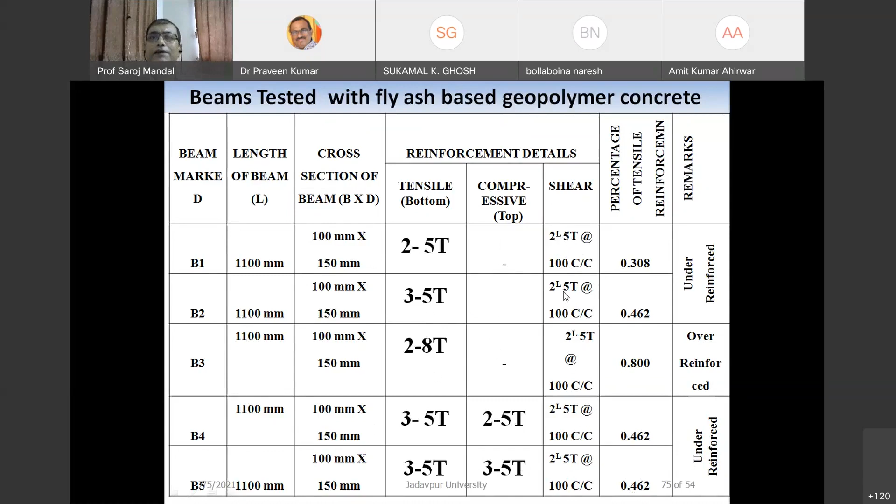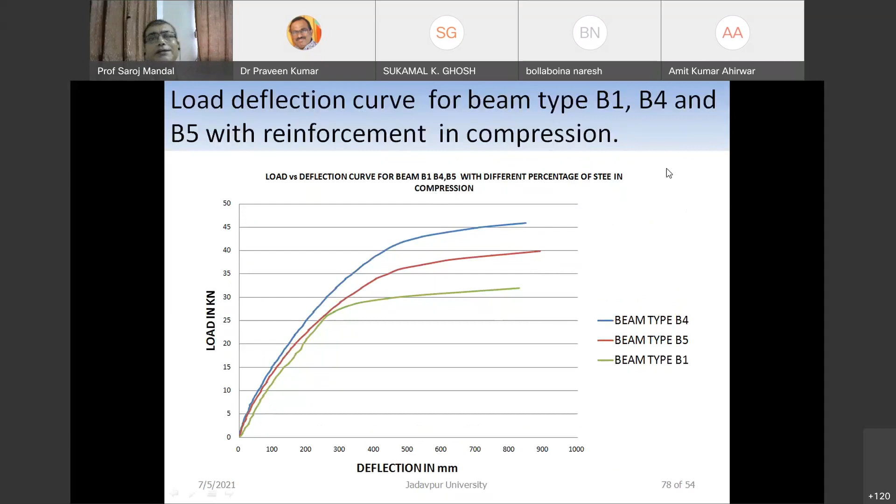B4, B5, and B1 - B1 is the same initial one. This case is for different percentages of steel in compression reinforcement, showing how load carrying capacity increases if we add compression reinforcement. It increases, same as normal concrete.

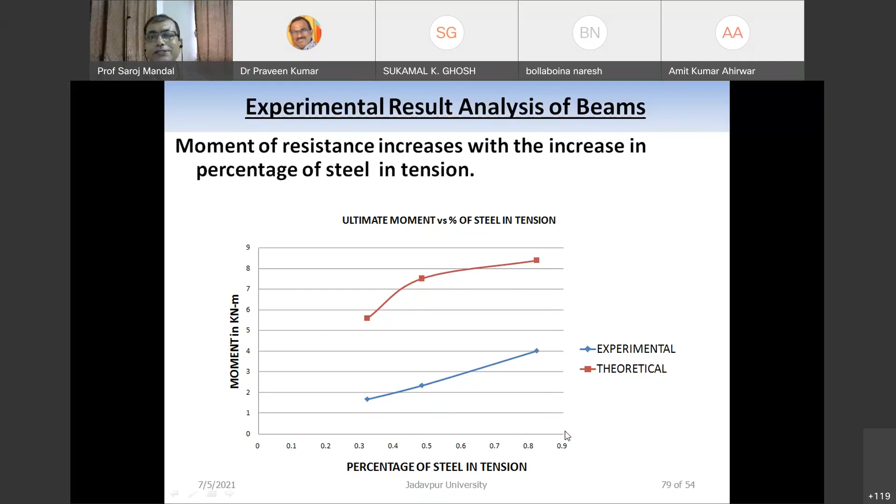The same is also applicable for MU and MR. This is MU - experimental and theoretical. Here the theoretical value is less and experimental value is higher. Always, for any beam test, even in normal concrete, the experimental value of moment of resistance will be higher than the theoretical value.

There are some other effects, normally called the arch effect. That effect is not taken into account in the theoretical calculation, which is why the experimental values are always higher.

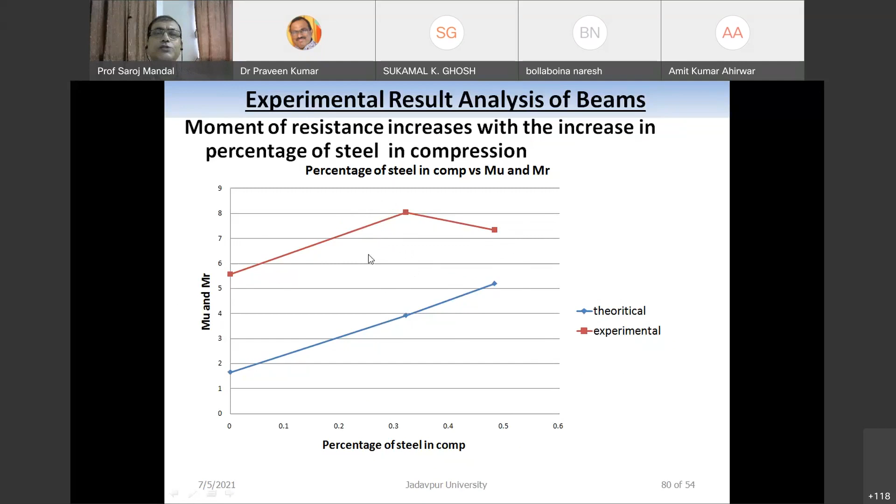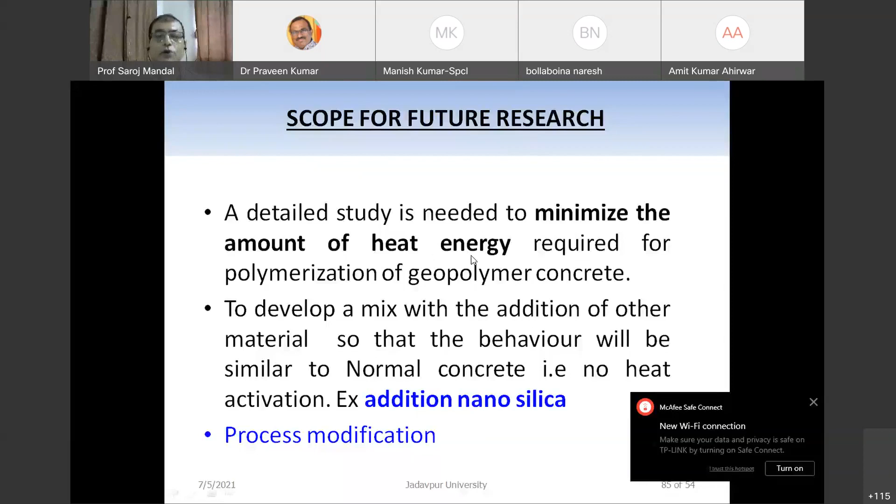Another important thing we have done is process modification. Normally, if we want to produce a small scale precast industry, you can change the process modification, and it can reduce your heat energy requirement. One of the students has also done these process modifications - let me show how this was done.

Mind it, here we have added only mortar because it is a very initial stage. We don't put any aggregate, that's why we only use sand and fly ash. We do not use any coarse aggregate. So what we have done here, this is the normal phase: sand and fly ash is mixed.

Then we add the activator liquid. We get a mortar, and then the specimen is taken, and it is heat activated at different temperatures for activation, and then after removal it is tested.

What we have suggested in your proposed process 2, which is suitable for any industry: what we have done here is just fly ash and activator, we just mix. We are not putting any sand here. Then we put activation here. That is, we use only 45 minutes instead of 48 hours, for different temperatures.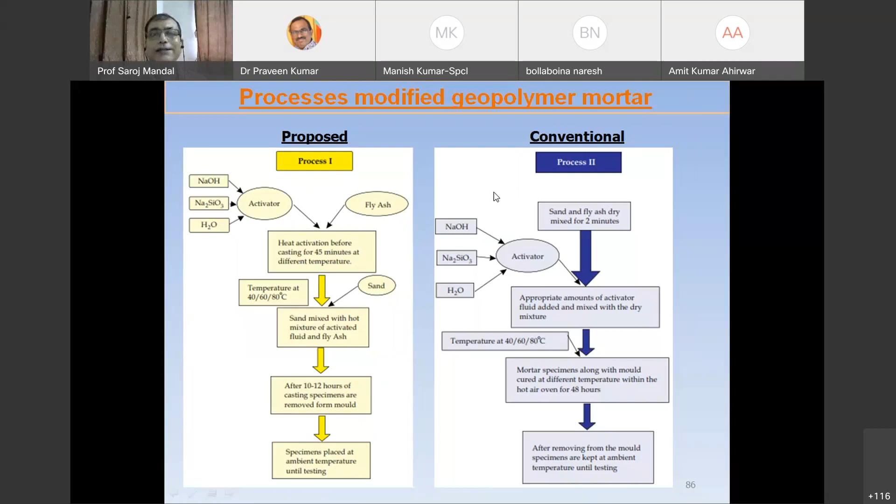So this is what is called process 1. Only in this case, heat energy is less. Instead of the conventional method, we propose this method. And now I am showing here that process 1 is your less heat, that is, heat cured for fly ash and activator fluid for 45 minutes.

Process 1, this is G7, G8 like this. So these columns are process 1, and this is process 2, that is your heat oven curing for 48 hours. So that is the difference.

Now, if we see this figure, that is process 1 and process 2. In these cases, process 1 mortar at fluid to fly ash ratio of 0.35, activated at 60 degrees C for 45 minutes, is about 16% more than process 2. So process 1 gives higher strength compared to process 2, at both fluid to fly ash ratio of 0.35 and 0.45.

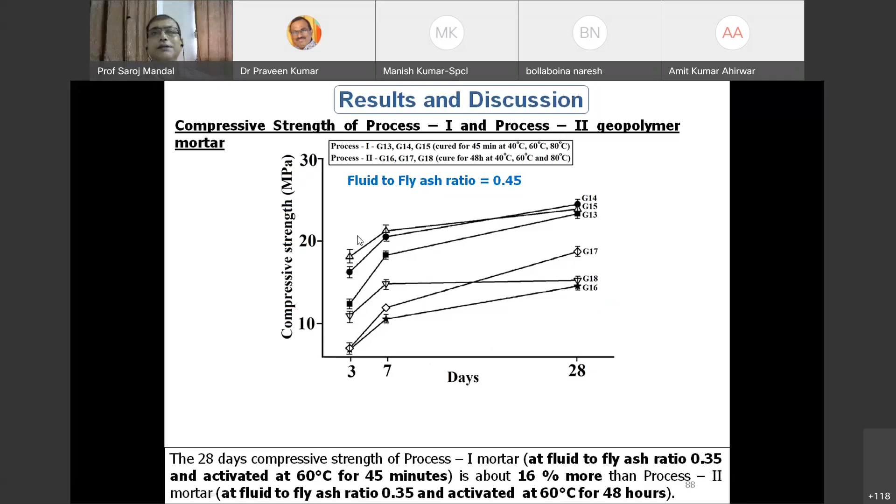What's the time now?

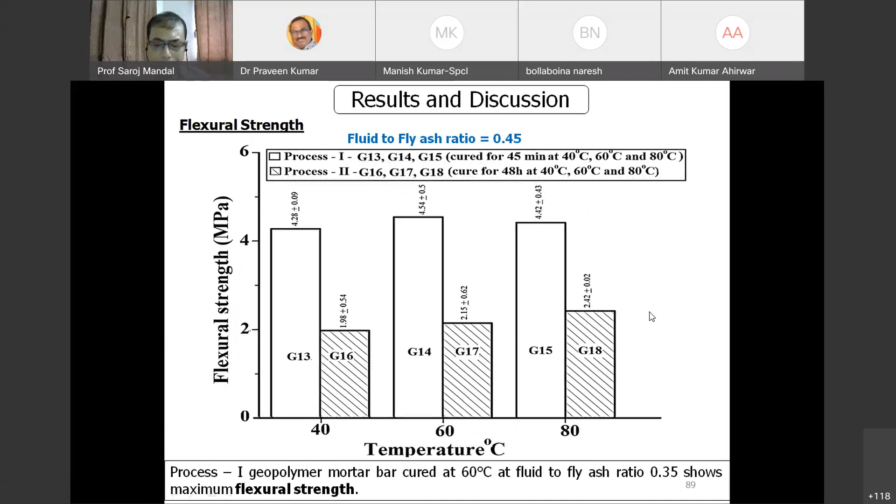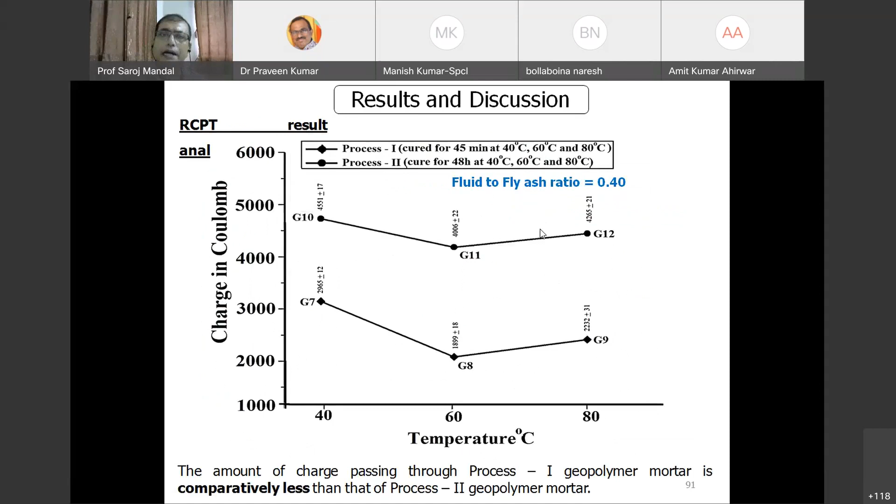Okay, now we have also found out the split tensile strength. So process 1 gives the higher value compared to process 2. And then we have also some durability tests, I am not going into detail of this. We are getting higher value in process 1 compared to process 2.

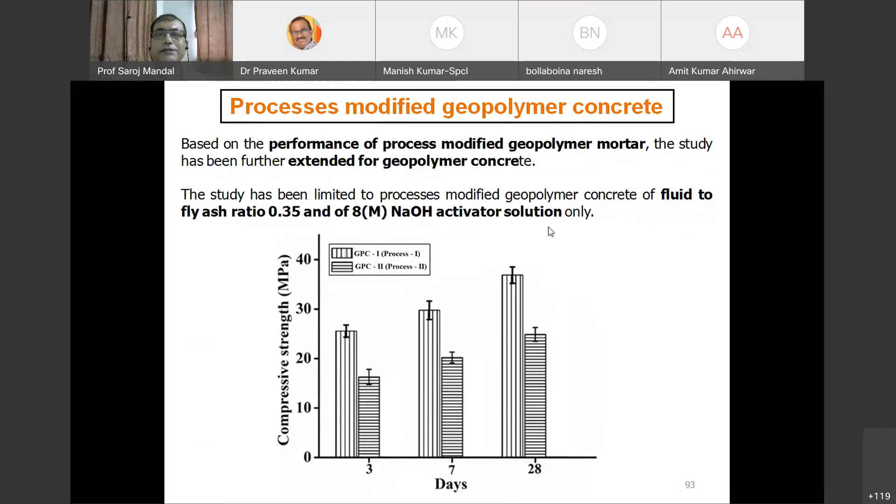So I'm not going into detail since we already have spent 1.5 hours. Based on the performance of the process-modified geopolymer mortar, we have seen that GPC1, process 1, is better, and that is a major benefit for the precast industry. Anybody can use it directly.

Now I am coming to the economic benefits of the whole project, which I already discussed earlier, a 31% saving has been achieved. The cost of 1 ton of fly ash is only a small fraction, sometimes even free, though nowadays it is available at a minimal amount. One cubic meter of alkali activated fly ash concrete costs around 1870, while normal concrete costs around 2720, so the saving is about 31%.

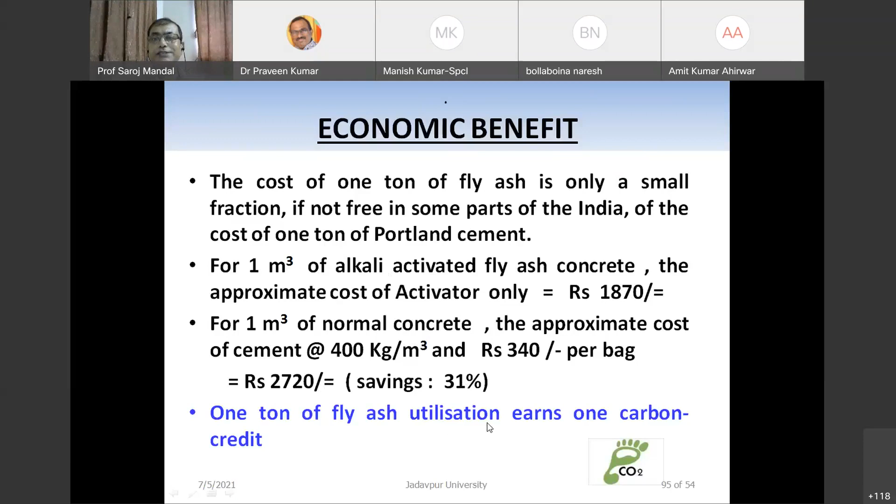So naturally the other costs are similar, only the material cost differs here, and 1 ton of fly ash utilization earns 1 carbon credit. That is one of the major benefits in this case. So fly ash based geopolymer concrete has excellent compressive strength and is suitable for many infrastructure applications.

Design provisions contained in current standards and codes are applicable to the design of fly ash based geopolymer concrete. Very recently the Bureau of Indian Standard has published a code, not exactly on geopolymer concrete, but named alkali activated concrete for precast blocks. They have already developed this, and you can look it up. I think the code number is IS 17452.

This was published in 2021, and there are some limitations. But they have specified what binding materials to use, the range of mix designs, and suggested that the curing temperature should always be more than 30 degrees C depending on heat activation. Minimum temperature of 30 degrees C is required, and the duration should be increased accordingly. This is a very good positive sign that the Bureau of Indian Standard has developed a code on geopolymer concrete for precast industries or precast products.

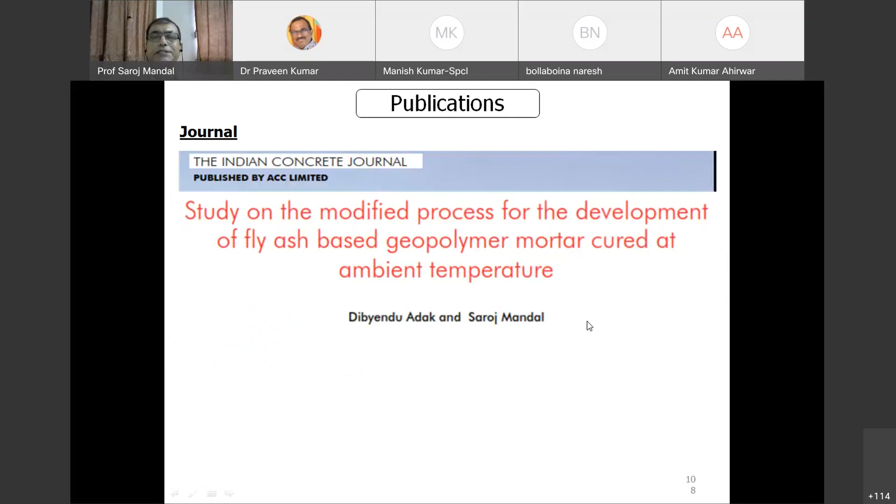There is also work on antimicrobial efficiency of nano silver silica modified geopolymer mortar for eco-friendly green construction products, published in Royal Society of Chemistry Advances. Then there is a paper on structural performance of nanosilica modified fly ash-based geopolymer concrete, published in Construction and Building Materials. There's also the study of the modified process for development of fly ash-based geopolymer mortar cured at ambient temperature, and another on generic and enriched microsilica facilitated self-sealing concrete, a sustainable material for new generation construction technology.

Thank you, thank you very much for giving me this opportunity for this lecture. Now we can take any questions. I am handing over to Professor Agarwal.

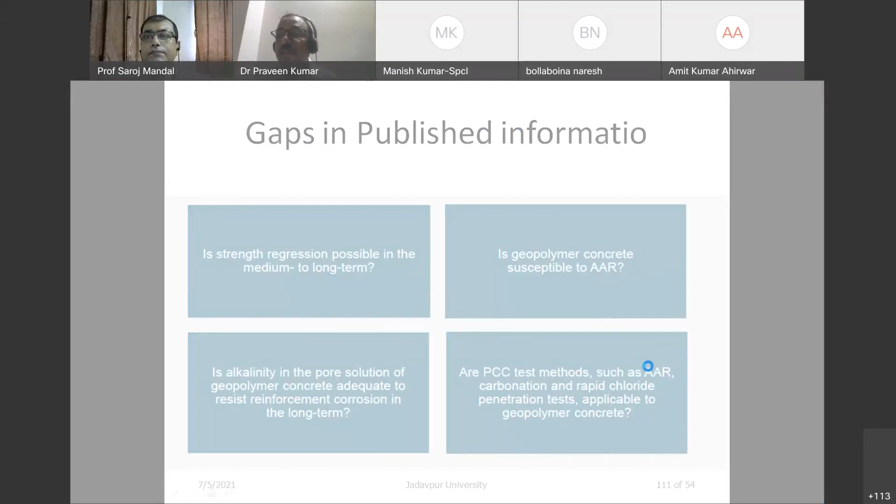I may request Sanchit Gupta to kindly point out which part we have missed.

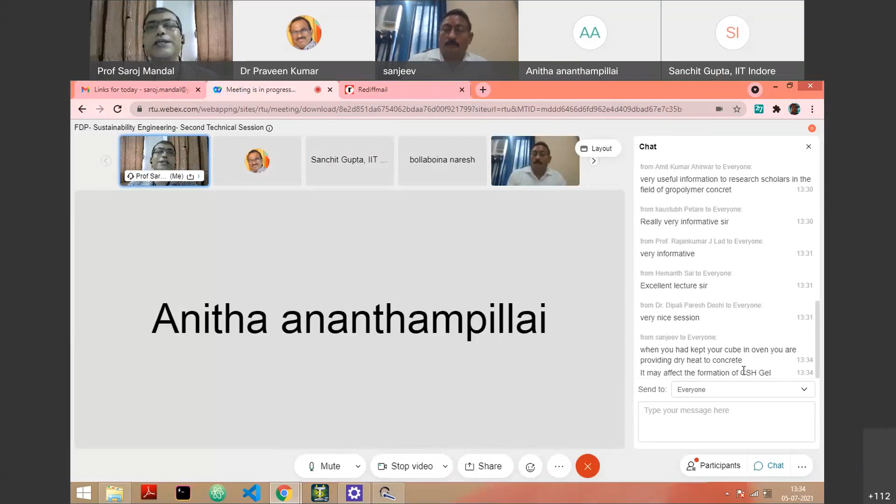But in this case, it may affect the formation of CSH gel. In this case, CSH gel is not formed, right? Basically, CSH is formed only in case of your concrete, or in case of slag also. But in my case, as I am using fly ash, so there is no chance of reduction in CSH gel.

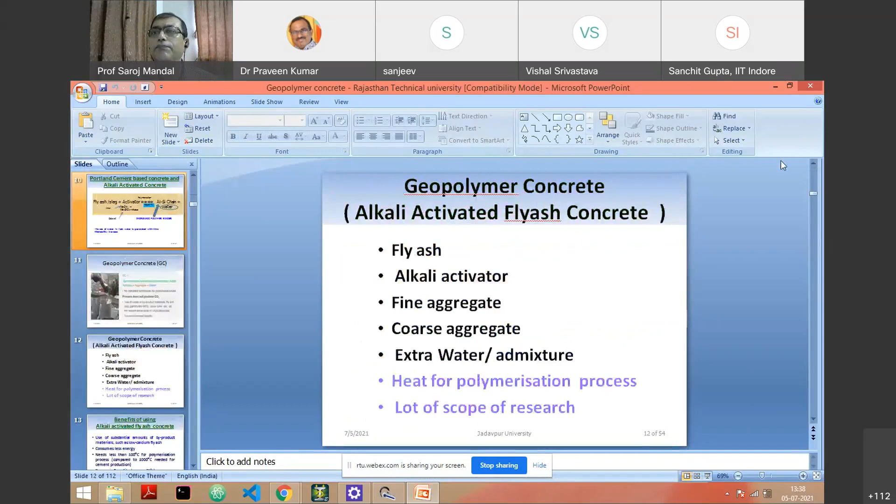This is available? Yes, sir, it is visible. I will go to that one. This is available? No, there are two, this one. Sanchit ji, can you please point out whether...

Sir, we could not listen to you explain the XRD graph from there on, like these three slides, after this. Yeah sir, from the XRD slide, just before that one, slide number 81.

You see, there is a... here basically these different peaks are coming, right? Out of which this has been mullite, that is the basic of this. And I think there is another peak here also, another peak here also.

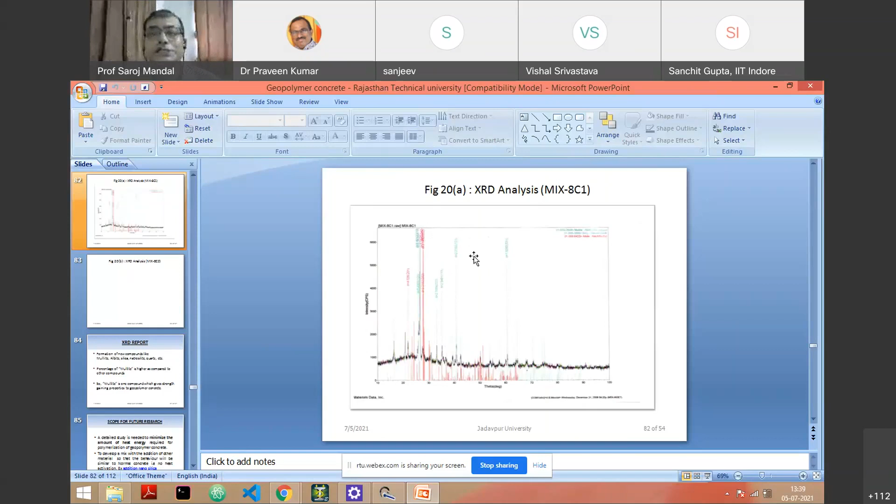So not very clear, I think. So from that we can check that due to this mullite, albite, and silica, and nitroselite and quartz, this has been the formation of new compounds.